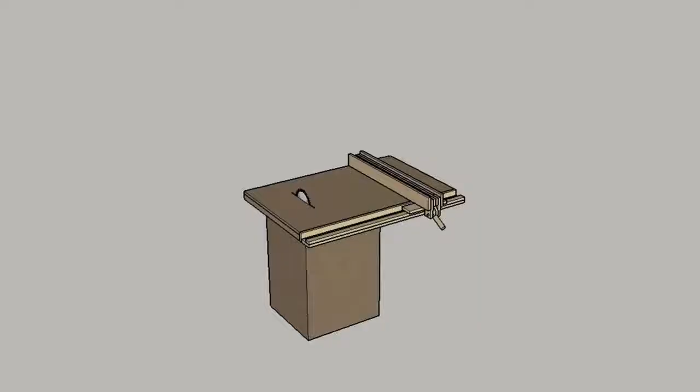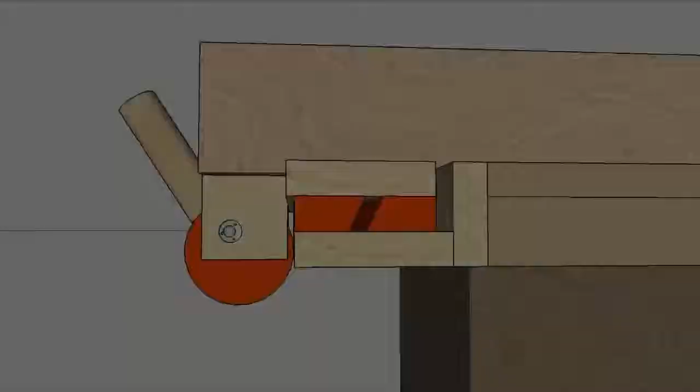Hello folks, today you will see how I created the easiest, steadiest, strongest, fully functional homemade table saw fence system. The innovation of this build is these two pieces of wood cut in an angle that, in combination with the cam profile of wood I made to tighten it further as I push down the handle, make it really steady and strong.

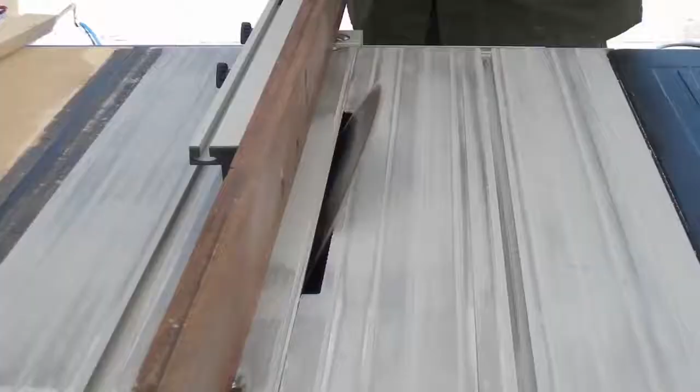For this part of the fence I glued two pieces 8 by 8 cm together, and before I cut it into a circle, I drilled a hole in order to put the handle in it later. Now with this way, I cut it into a circle. I sand the handle and the round piece of wood, glued them together, and filled the gaps with dust.

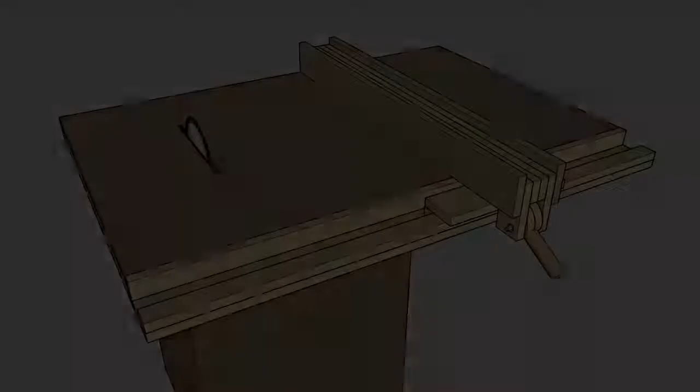For this part of the fence I used melamine so that all the pieces that I'm going to cut can slide smoothly on the fence with no problem. I placed PVC perimetrically, and with a putty knife in this direction I cleaned all the edges. Now for this part of the fence I glued, nailed and screwed these two pieces together. And then I repeated the same process for the guide rail of the fence.

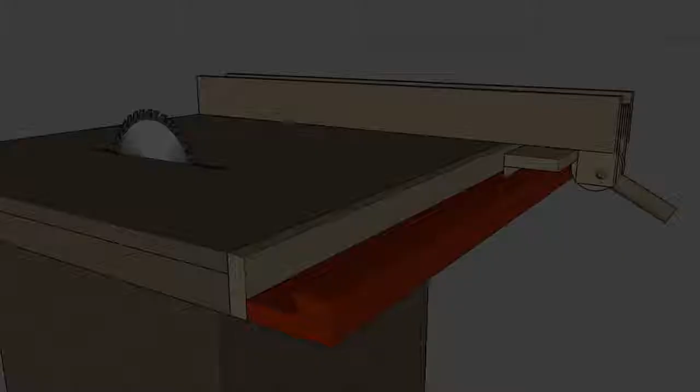I sand the edges of both pieces so that when they fit together, their tips don't touch with each other, allowing these pieces to be tightened nicely and strong with no problem. Then I glued, nailed and screwed this piece onto the guide rail, which will be mounted later on the table saw.

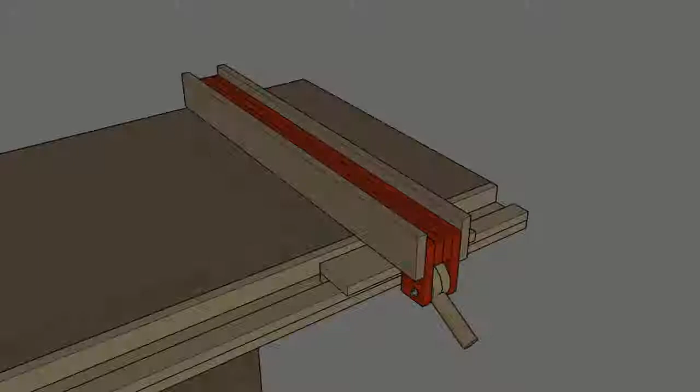Now for this part of the fence I started putting together all the pieces of wood that I needed. After that I took these two pieces, found their center, aligned them and screwed them together. This can be done using a tri-square or checking the distance between the blade and the fence with a tape measure.

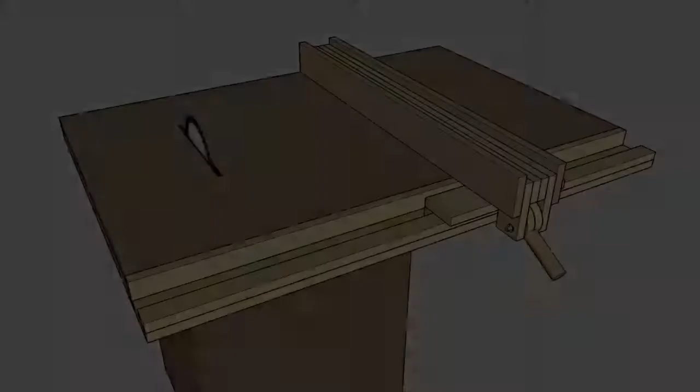I shaped this part of the wood with a rasp so that the round wood with a handle can be tightened on the guide rail without them bothering each other. After these two pieces were aligned, I took the piece I made before and placed them together.

Then I put the round wood with the handle between these pieces of the fence, found the right place that can be tightened on the guide rail, and I drilled an 8mm hole straight and right through, but far from the center, in order to make it a cam wood. I tested it with an 8mm pin and it works really fine.

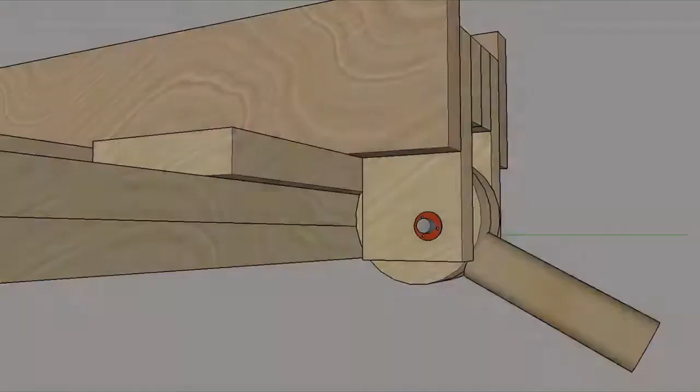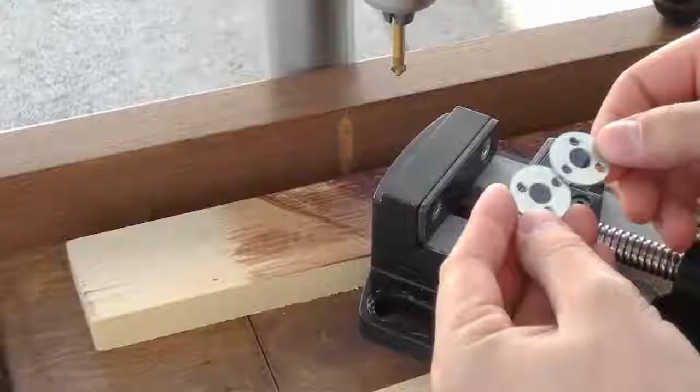To avoid the wood splitting up when it is tightened, I placed this little piece of pipe with an outer diameter of 10mm and an inner diameter of 8mm, same as the pin, into the round wood and these two washers on the outer side. And now I glued and screwed the two pieces of melamine on both sides of the fence.

I cut the 8mm pin in the right length, sanded it, drilled the two holes at the edges to put later the two nails that will hold it in place, and then placed it together with the round wood.

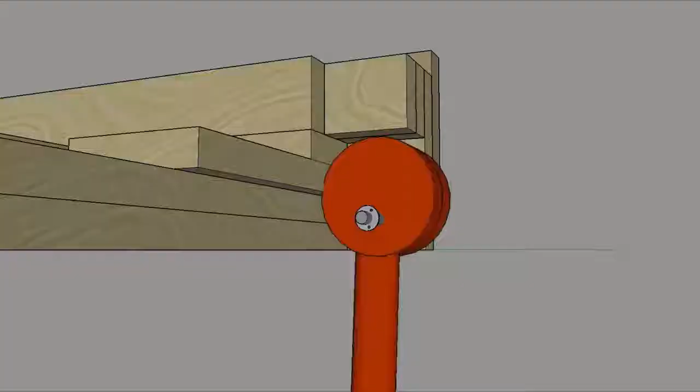I placed this piece of wood at this part in order to prevent the round wood with the handle from going lower than it should, making sure that it stops on the guide rail exactly at the point where it is tight enough. I also added PVC tape on the round wood for it to be tightened even better on the guide rail.

To show you how it works in practice, I used the top surface of my previous table saw and there we go.